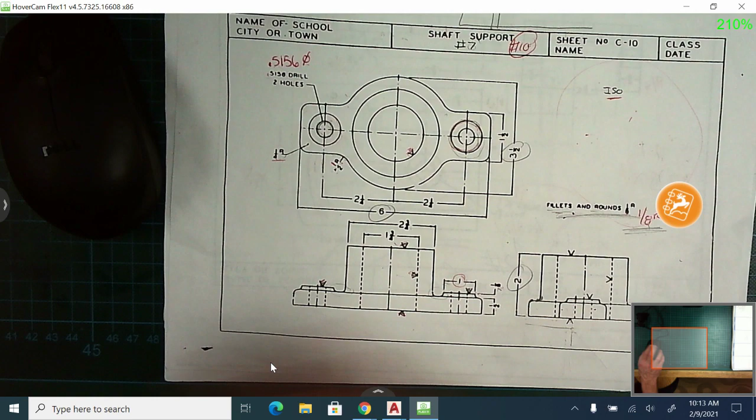In this video, we'll take a look at the shaft support. This is going to be a 3-view drawing: a top, a front, and a right side. We'll also do the isometric here. So find that packet and drawing, and open up CAD borders.

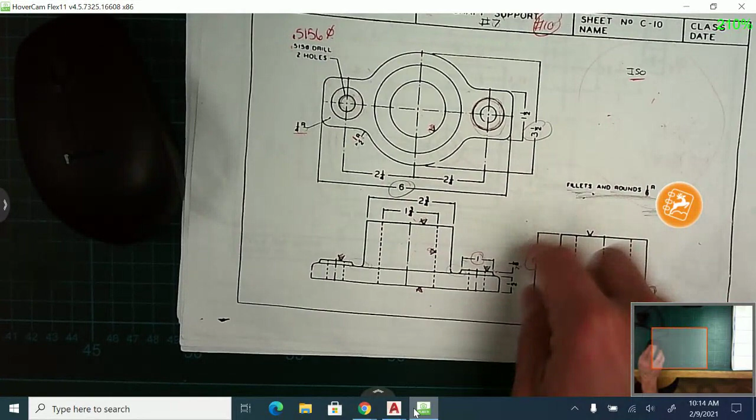Another thing you need to do is determine your overall height, width, and depth. So overall height, how tall the part is, overall width, and then the depth, in this case 3.5. These three numbers I have circled. That's what's going to help you set up the drawing using kind of like an L shape and then offsetting the boxes. Once you get the boxes set up, the three views will fit inside. We're also going to set up a 45-degree miter line to help us project the top to the side and then the side up to the top.

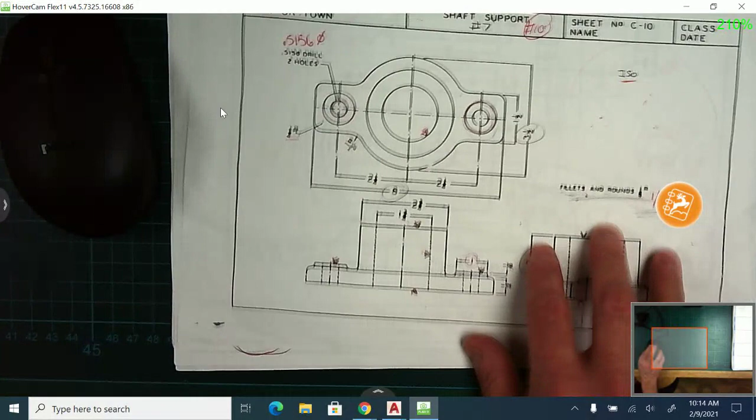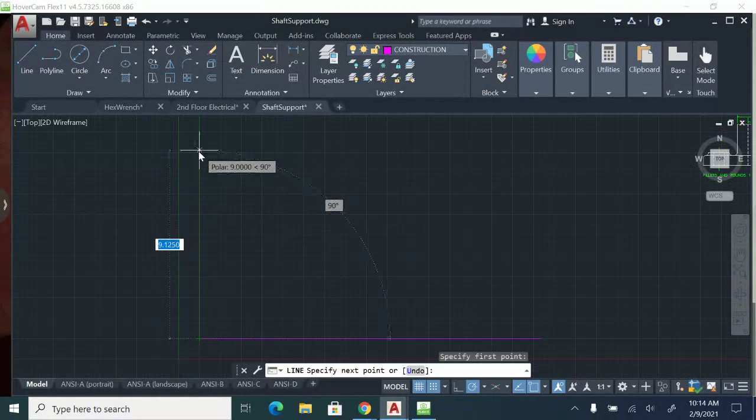So now that I have the height, width, and depth, I'm going to use those as my offsets. First you want to start with the construction line. I like to go about an inch over, inch up roughly from the 0, 0 here. So here I go over, 16 is plenty. You just don't want to make those lines too small, it's better to make them longer. Then here I'm going to go up, 10 is fine. So I kind of have my L shape. That's going to be the lower left-hand corner of this drawing.

And now I'm going to do offset. The height will be 2. Width is 6. I also got to do a 1-inch space in between the views, and then 3.5 for the depth. So for the height, I'm going to do O enter for offset, 2 enter for the height, offset that up. Now I'll do the width, which is 6.

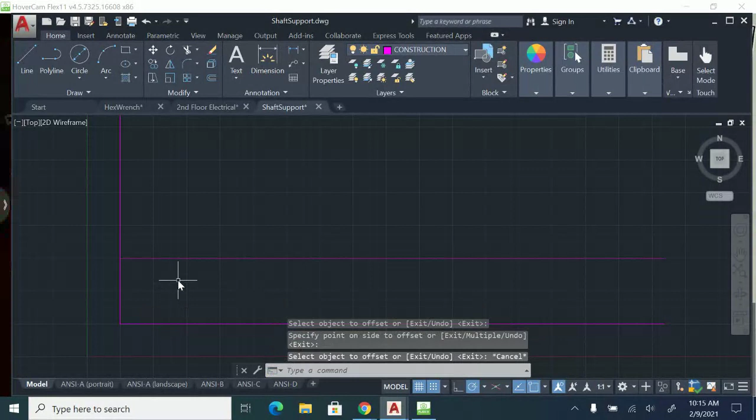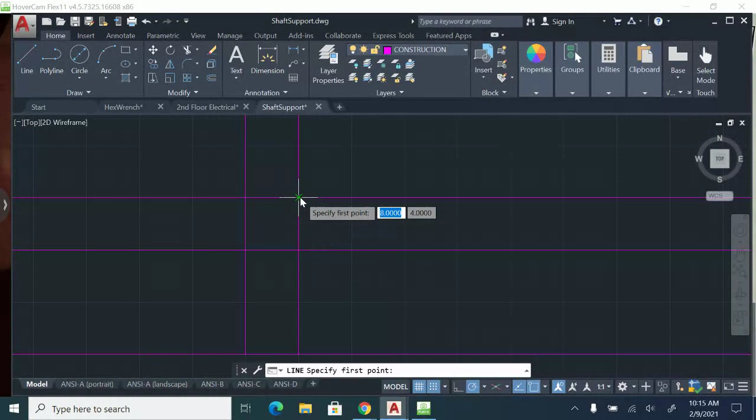Now I need to do my 1-inch space in between the views. So offset 1 inch, this one up, 1 inch over. After you do the 1-inch spacing, you'll notice you'll have a square. The upper right corner of that square is where you want to do the 45-degree miter line to help you project the views. Again, it doesn't really matter how long this one is, just don't make it really short. I'm going to hit tab, 45. We want it to be exactly 45 degrees.

My last offset is going to be my depth, which was 3.5. So offset 3.5.

All right, so now I have my top view, my front view, and my right side view. It's a good habit to just double check the measurements. This should be 6, that should be a 1-inch space, this should be 2, which is good. We want to double check this right side view. So that's 3.5, that looks good. This is 2. So just double check your measurements.

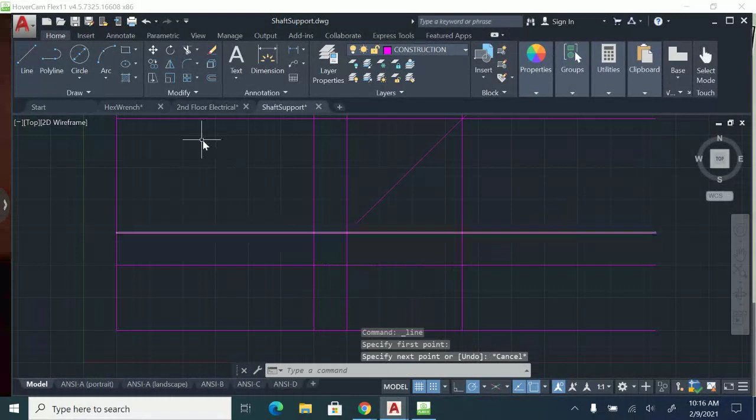Another thing I like to do is hatch the spacing just to help me visualize that that's just a 1-inch space. So you can use your hatch tool by clicking that or H enter, and then I just click in here and down there as well, and then hit enter. So now the 1-inch spacing is hatched in, so I can easily see my 3 views here.

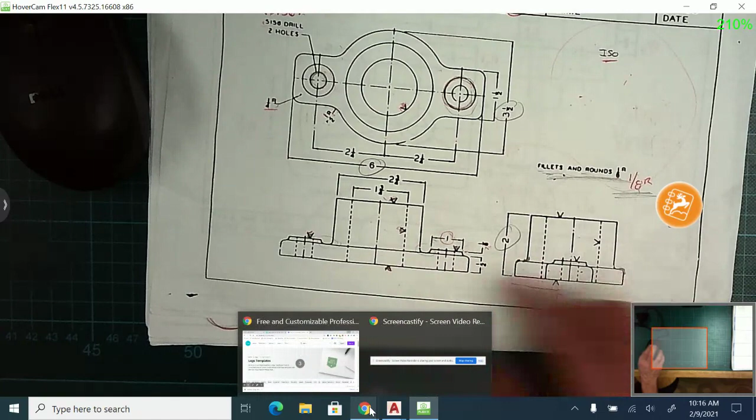And now you just got to start drawing the insides. Again, try to use offset. Like for instance, this base is a 1/2 inch thick. That's the same in the right side view as well. So if I do an offset, I'll set it to 0.5. I'll offset this bottom up a 1/2 inch. So now I have the base not only in the front view, but the right side view.

And if I want really quick, I can switch to visible, use my rectangle tool, and I'll just trace over the base here, hit enter, and then trace over the base there. So that's my 1/2 inch base in the front and side.

Now for the top view, I could kind of do the same thing. I'm going to trace over this whole thing. The reason why is I can easily get to - let's make sure that goes all the way down - I can easily get to the center points, like I can get to the midpoint. I can get to the midpoint here and draw a line down.

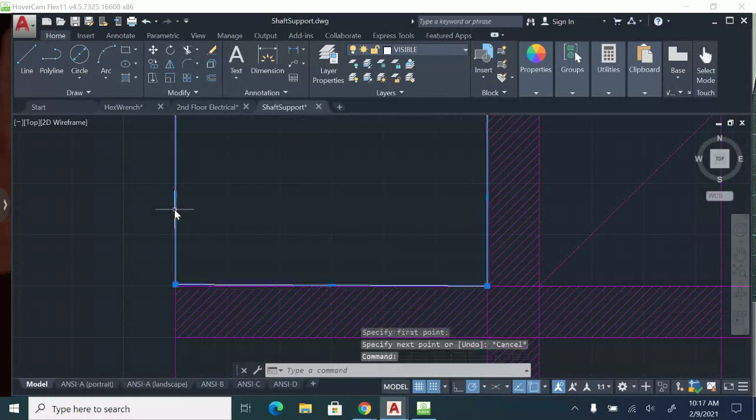Actually, I have to redo this rectangle because I don't think I got it perfect. Rectangle, let's make sure that's from here to there. So make sure you're zooming in, you're getting the right points. And the reason, again, I did that is I can now get midpoint. Midpoint here, go straight down.

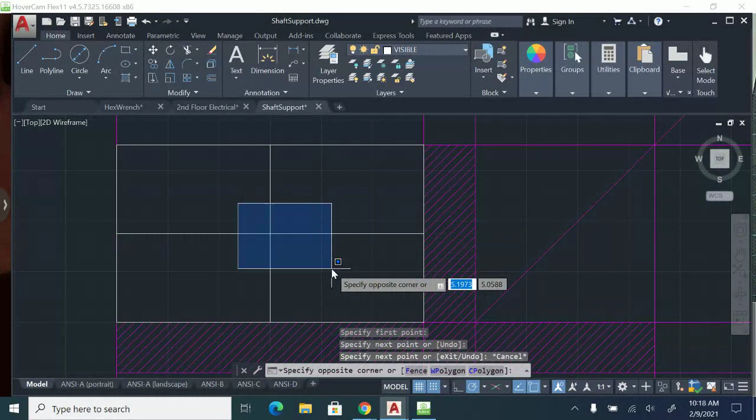And midpoint here, go straight across. So that'll be the center of all those circles. So I have 3 circles, 1, 2, 3.

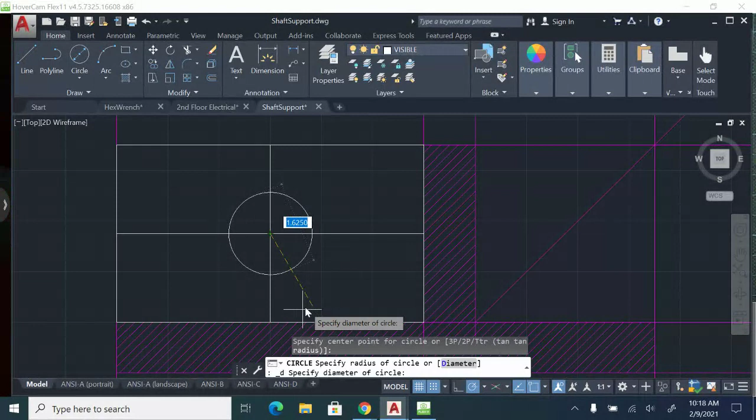The big one is going to be 3.5 diameter. The middle one is 2 3/4 diameter, and the small one is 1.75 diameter. So I go back here, I got to make sure I'm using a diameter circle. Let's do the outside one, which is 3.5. The next one is 2.75. And then the third one is 1.75. So those are my three circles.

The outside one, some of it will be trimmed. The next thing I want to do is get the thickness of this middle part, which is 1.5 inches.

So I already have the middle. I drew that line all the way across. And if it's 1.5 inches total, what I could do is offset that line up and down half of 1.5, which would be 0.75. So I can go up 0.75 and then down 0.75. And that gets me the middle of that top view.

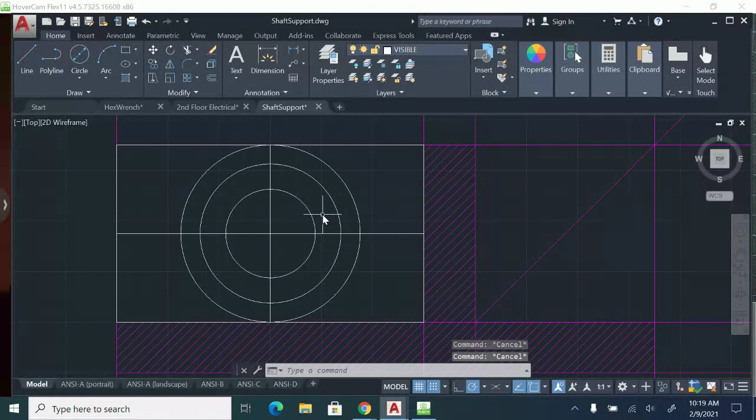So I'm going to do offset 0.75. This line I'm going to go up, click this line, go down. And now for here, I want to trim.

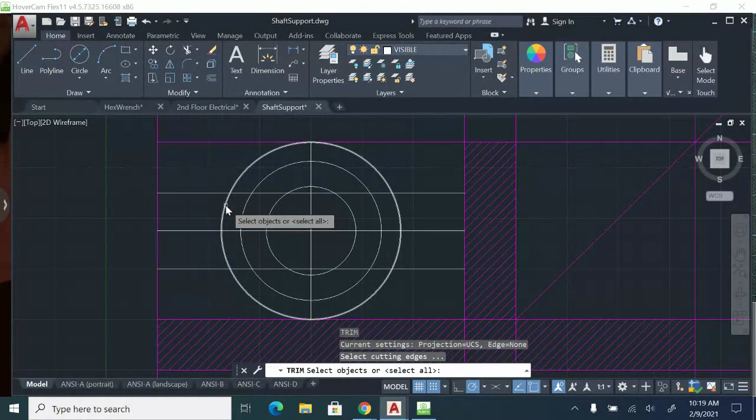So let's do it. Actually, I'm going to delete that rectangle I drew. Now I'm going to do TR enter. I will keep that big circle, hit enter, and I'm going to get rid of these lines on the inside.

Now I'm going to do another trim, TR enter, and I will keep these lines here. 2, 3, 4, hit enter, and I can get rid of the big circle. Now I don't actually need these lines anymore either. Get rid of this, so you can kind of see how it's starting to shape up here.

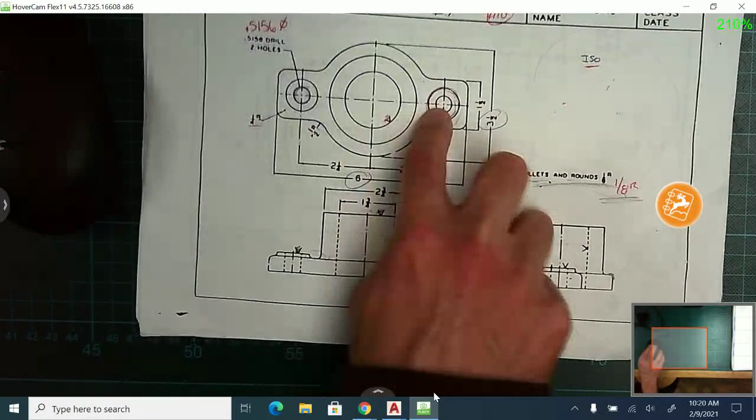And another dimension, I got to get these center points. It's 2.25. From the middle over to this center point is 2.25. So let's do that. So I'm going to go here.

Now for that, I'm just going to draw a line. I'm going to get the midpoint. I'm going to go this way, 2.25. And same thing on the other side. Midpoint here, or center point, and go this way, 2.25.

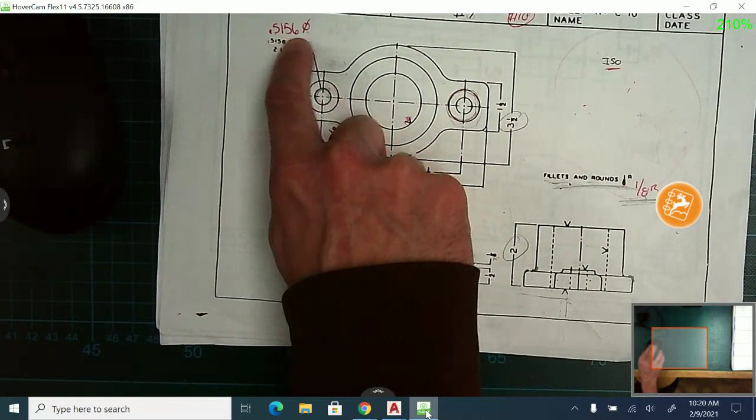Circles, there's two of them. The inside smaller circle is 0.5156 diameter. The larger circle, you find a dimension down here. It's 1 inch, and that's also a diameter. And they're both the same.

There's two of them, so let's do a diameter. Let's do the small one, 0.5156 diameter. And the big one, 1 inch diameter.

Now I could do this too. I could just select both of them. Use my copy tool. Base point would be the center or the end point there, and just move them over to here. So you don't have to redo them.

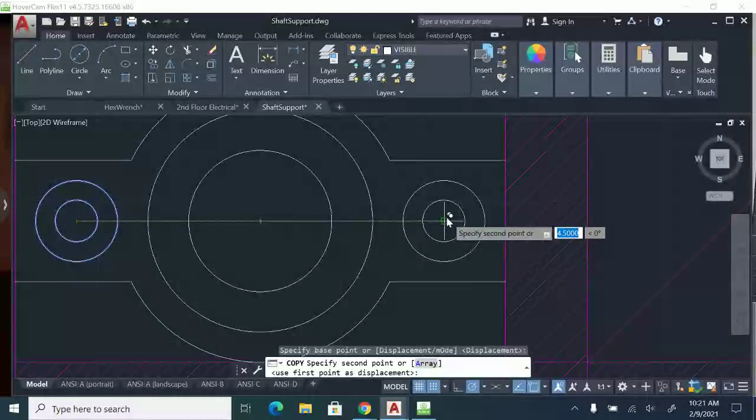I can draw a line now to connect this to here, and to connect this to here. So you're going to delete these lines. You can kind of see where we're at.

The only thing left in this top view is the corners, which you're going to use the fillet tool. 1/4 inch on the 2 outside or the 4 outsides, and the inside corners are 1/2 inch. And you're going to use the fillet tool.

So F enter, R enter, 0.5 is for the insides. Hit enter, it'll remember.

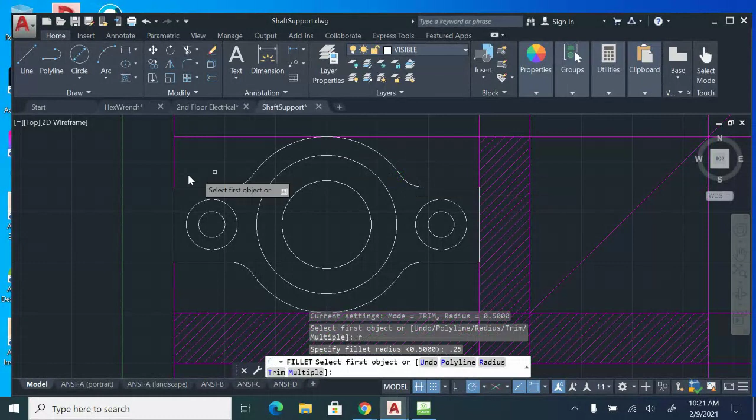And the outsides are 1/4 inch, so I'm going to switch it. So F enter, R enter for radius, and these are 0.25. Okay, hit enter.

There we go. My top view is done, other than center marks and dimensions.

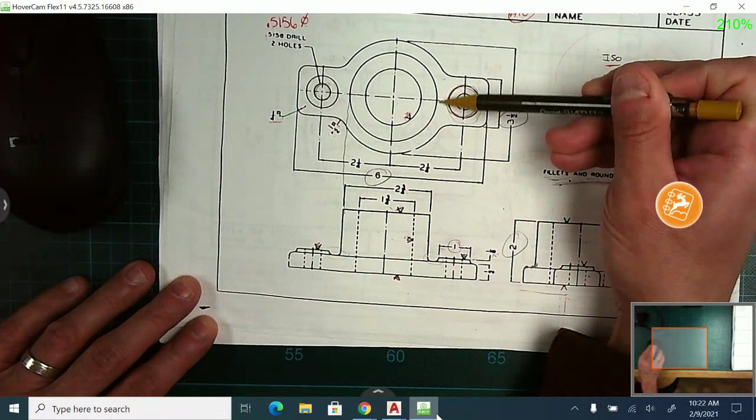Now for this front view, what I could do is just project down. Like I can just grab a line, project down like that. It's going to match up with this. That's going to match up with this. The two hidden lines are the inside circle. Now the two holes here, I can project them down as well.

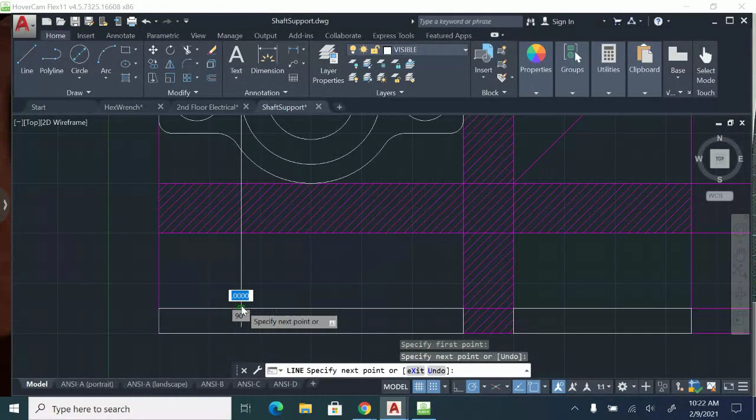I'm going to go back here. We'll start with the visible. Let's do the bigger of the circles, which would be the 2 3/4. It's going to go down to here, perpendicular. And then the right side of it.

Then I got to switch to hidden line for the inside circle. Now that one goes all the way through to the bottom.

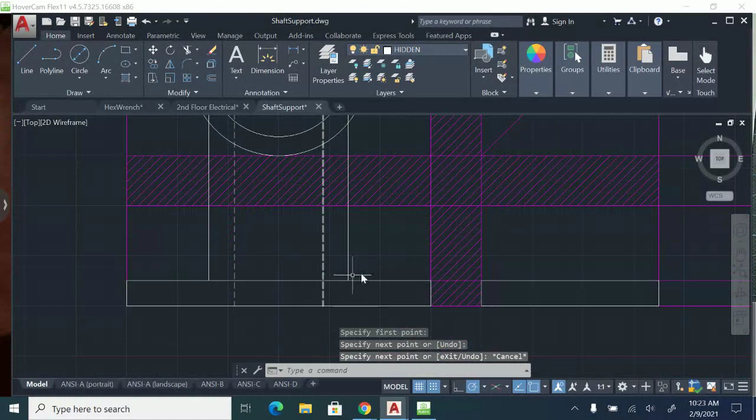And then I can also do this, actually I could leave it on hidden line. I'll do the inside circle here. Now I'll switch it to visible, and I'm going to do the outside circle. Now that one only goes to the top.

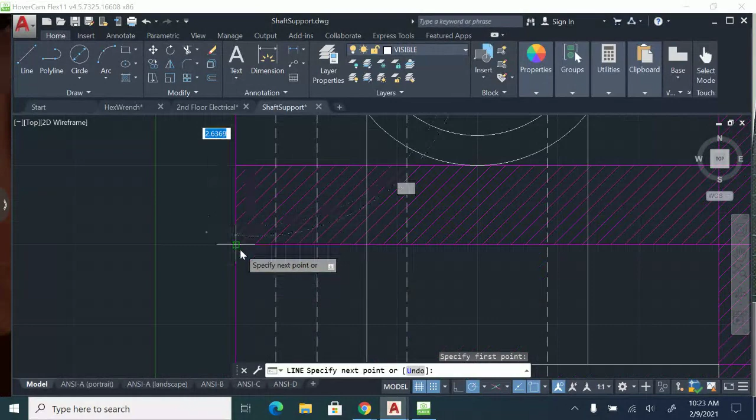And obviously you would do the same thing with these holes and bring them down. Now I can trim a little bit, I don't need all these lines. I'm going to do trim. Let's keep the top of this. Enter. And let's get rid of all these lines to clean it up a little bit. But you see where they just came from.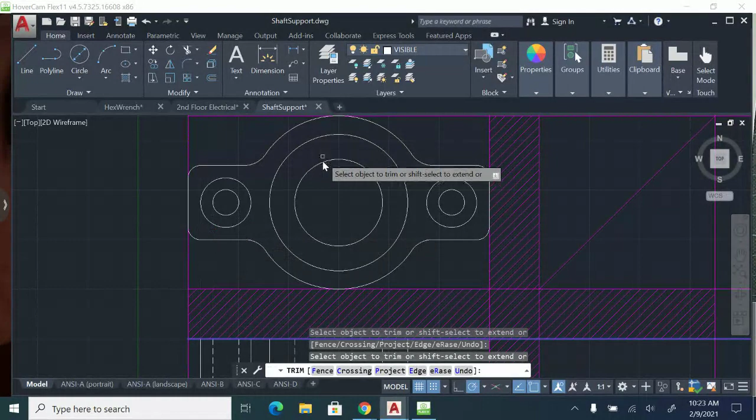All right, and I got to trim even a little bit more now. I need to trim, actually, the thickness too. The 1 inch hole, it goes up a little bit, 1/8 of an inch. So we have that little 1/8 inch measurement here.

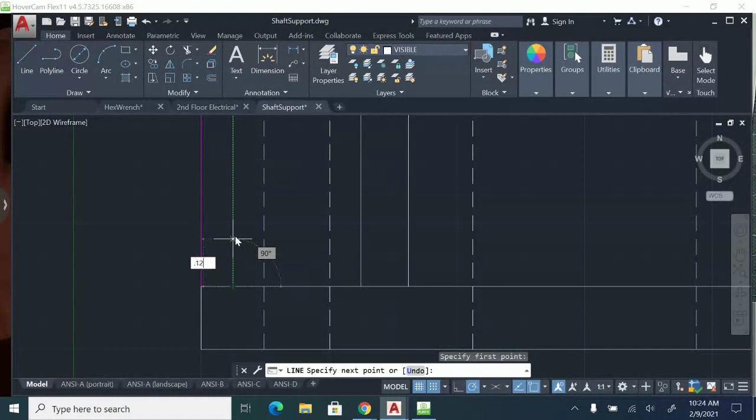Let's do that really quick and offset it. So, or I don't have to offset, I guess I could just do this. I can go in here, grab a line, just go up 0.125, and go over 1 inch and then back down. Now when I trim, I'll keep that 1/8 inch line and get rid of these.

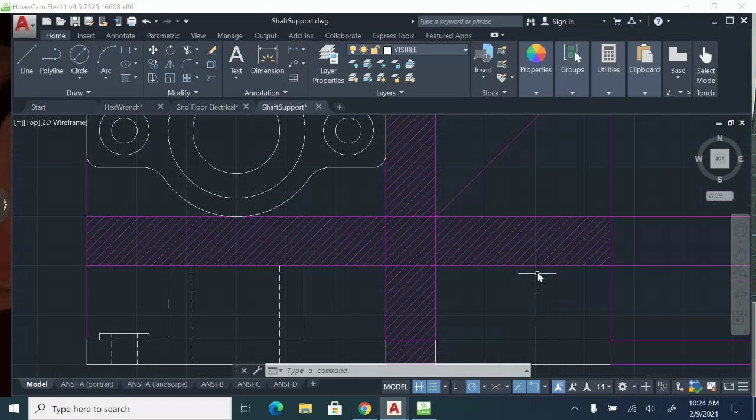And then obviously I would do the same thing on this other side with that one, the right side. A lot of projecting again. I can do...

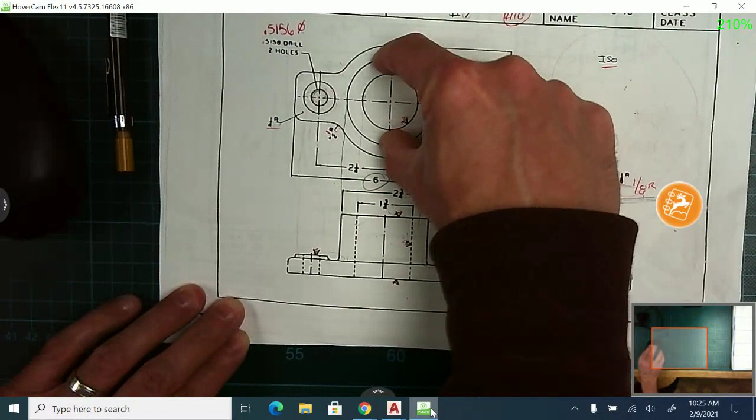Maybe I'll do construction line here to start, since this one I'm going to project over and down. So I need to get this little shape here, that's this part, so I'm going to bring that over and then down. And then same thing, the circles, I got to bring the circles over and down.

So if I go back here, I'm going to use construction line, so maybe I'll start with the circles. We'll do this one here where it hits the 45, the intersection, that's where you want to draw the line down. And the bottom one, again, bring it over where it hits the intersection point, you bring that one down.

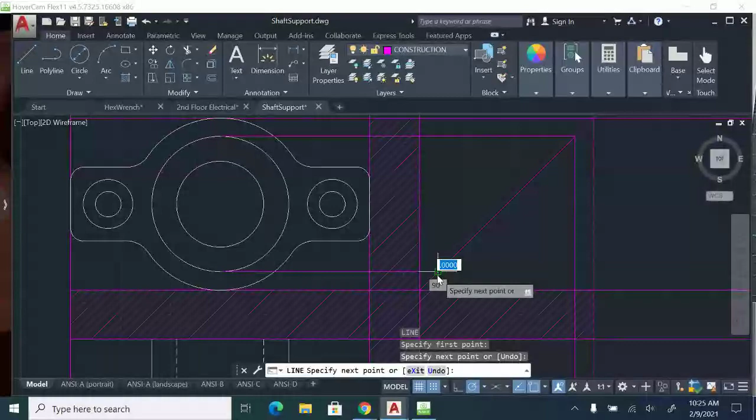So again, you don't have to do any measuring. This is, again, it's called orthographic projection, kind of does the work for you. Grab another line, we're going to do the inside circle, which eventually we'll put that on a hidden line layer. That one goes all the way down to the bottom. And the inside circle here to where it hits the intersection point of the 45 and bring that one down.

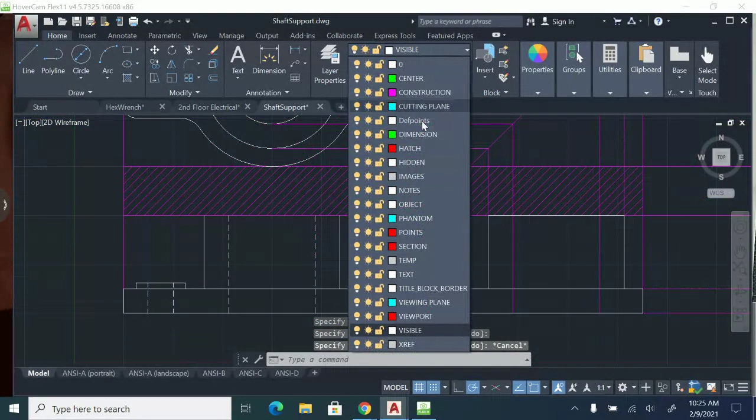So if I want now, I could do this. I can switch to visible layer, grab a line. I can go draw up, over, and down. And then the inside one is hidden, so I click hidden line, and I just draw a hidden line from here. I go down, and then here I go down.

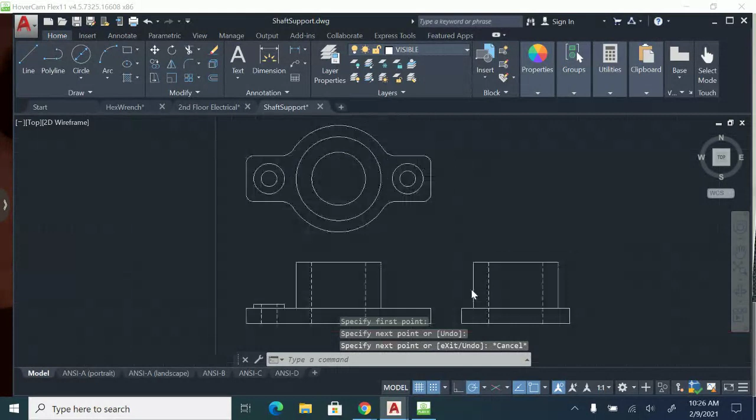And if you want really quick to kind of see where you're at with this, turn off the construction lines every once in a while. See here, it looks like I have to go back to visible, I got to connect the top of this. So you can kind of see where we're at here. So the only thing really left is this inside part, which is this part of it.

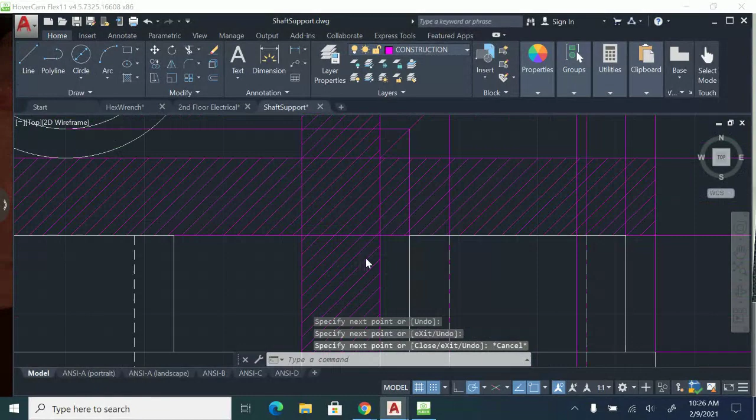Let's turn our construction lines back on. All right, so I'm going to go construction line, grab a line. I'm going to go from this point where it hits here and then go down. And then same thing for the bottom point here, bring that over and then down.

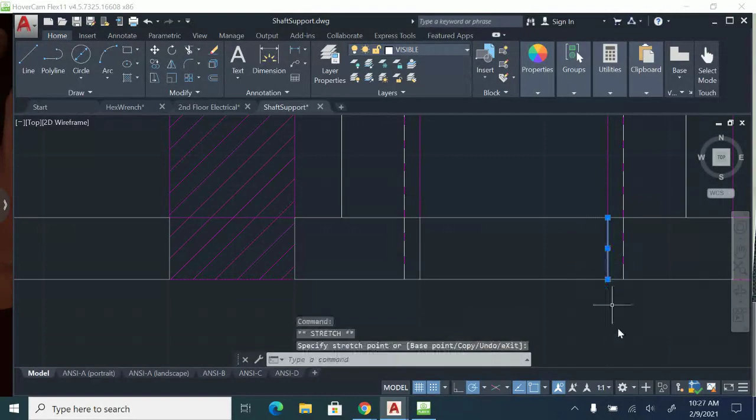And then I can switch to visible, and I'm going to draw this up, line up, and this line up. So those lines that I just drew are right here on the packet. This line right here I just got, and this line I got.

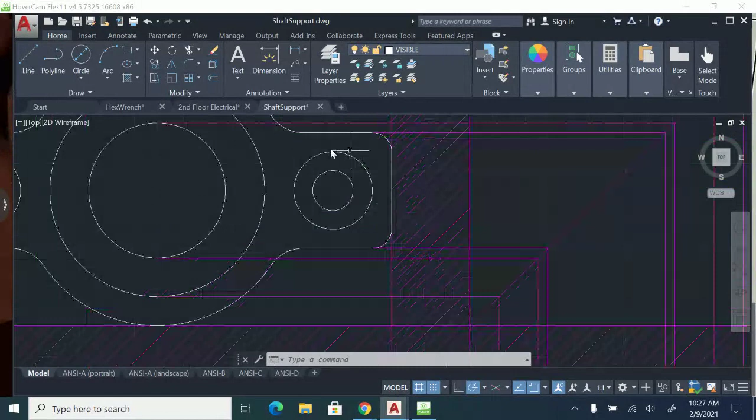Now I got to get the hidden lines and the 1 inch part up top too. So the two hidden lines, a couple different ways you could do it. You could project it down. Like I could project this over and down, project this over and down, project the two hidden lines over and down.

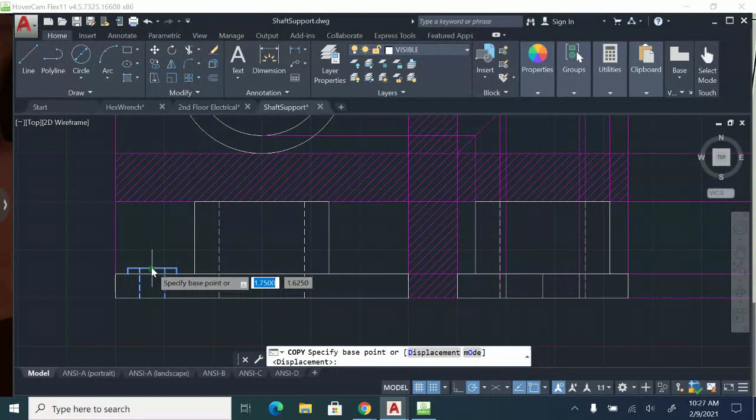Or if I find the midpoint here, so I know that's the middle, I could just take this that I've already done, copy it from the middle, or I guess I got to go right here, and I could just copy it over to right there. And then I'm going to delete this little line since I don't need it anymore. I'm going to turn off my construction lines again and see what I got here.

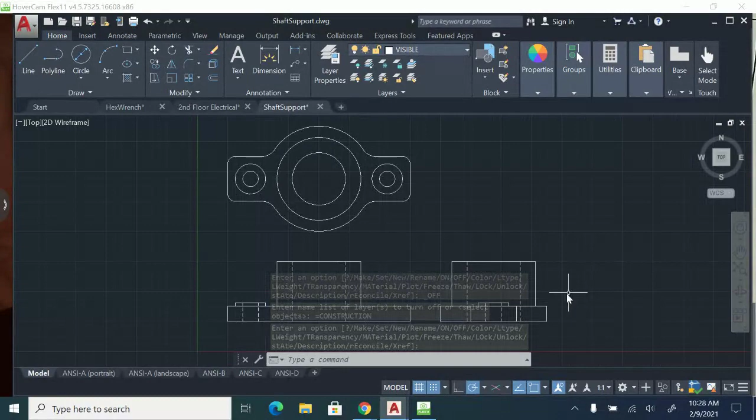So it's looking pretty good. The only thing left is this. I have fillets and rounds, 1/8 inch radius, so that's all these little curves and corners. Like I have an 1/8 inch fillet here, an 1/8 inch round here. So all these little curves are 1/8 of an inch, and you use the fillet tool to do that.

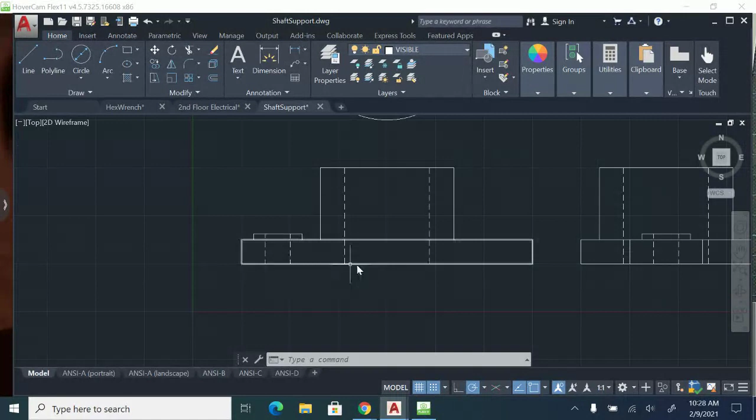If I go back here, so there's a lot of them I got to do. So I'm going to do an F enter, R enter, set it to 1/8 of an inch. I'm going to zoom in here, we'll start with this view. I'm going to do the round, hit enter, and the fillet there. And actually, because I used the rectangle tool, did you see what happened there? It kind of deleted everything. Let's do that one more time.

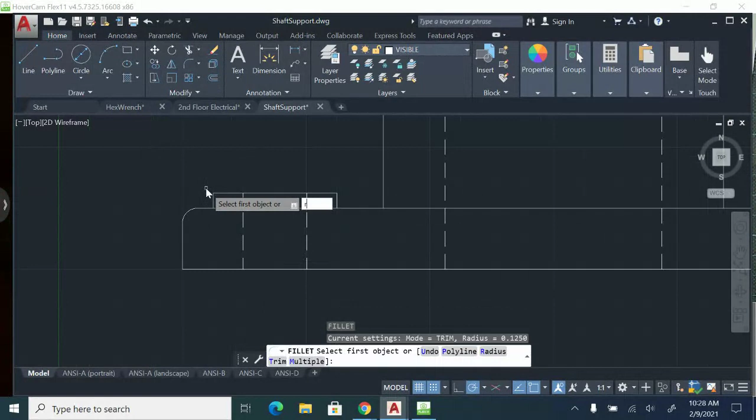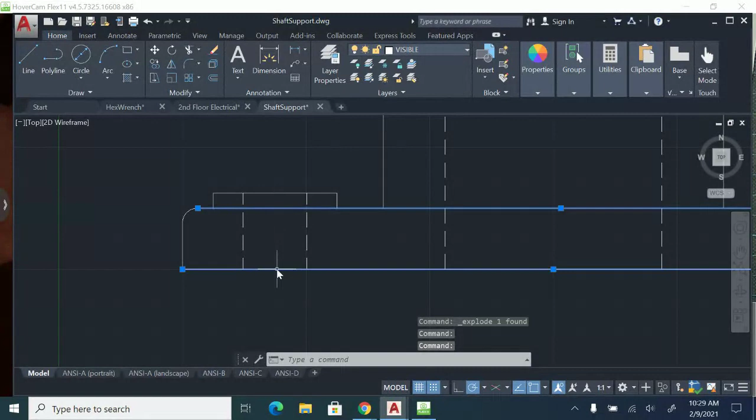See how it's deleting most of it? Since I used the rectangle tool, I'm going to click explode to break it up so it's no longer a rectangle. Hopefully now it's all individual pieces. So if you use the rectangle tool, you may need to explode it first.

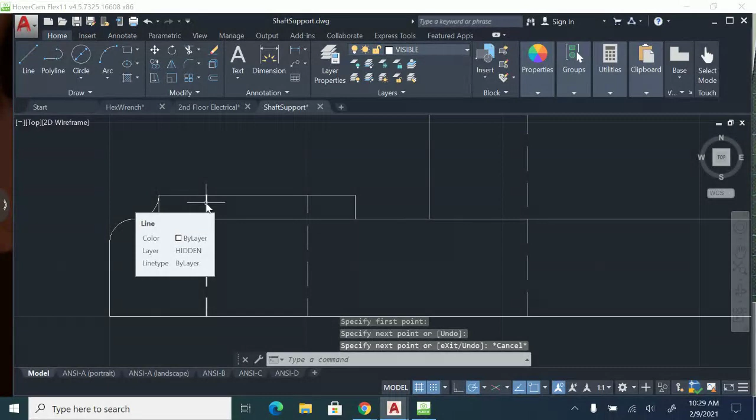Let's try that again. F enter, R enter, 1/8 of an inch. So it did delete that line again, but it didn't delete everything. If that happens, you're just going to have to redraw this line in. And then I can also get rid of this line, I don't need it.

F enter, R enter, make sure it's set to 1/8 of an inch. I got to do here, I got to do right here. Again it deleted the line. Sometimes it does that for some random reason. I'm going to go just draw it in again.

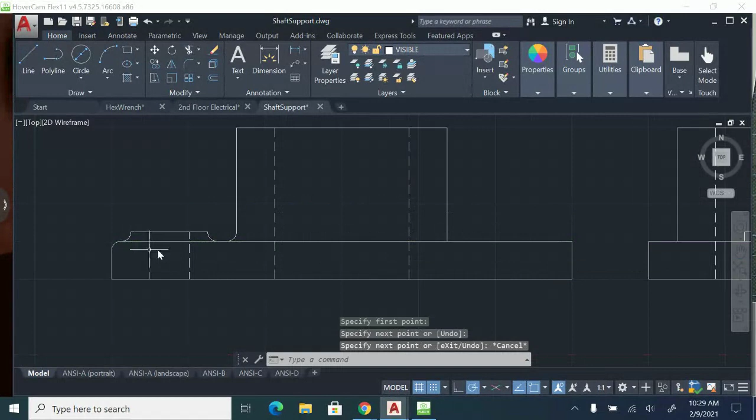So this left side looks pretty good. That's what it should look like. You would do the same thing on the right side. If it deletes the line, you're going to have to redraw it in.

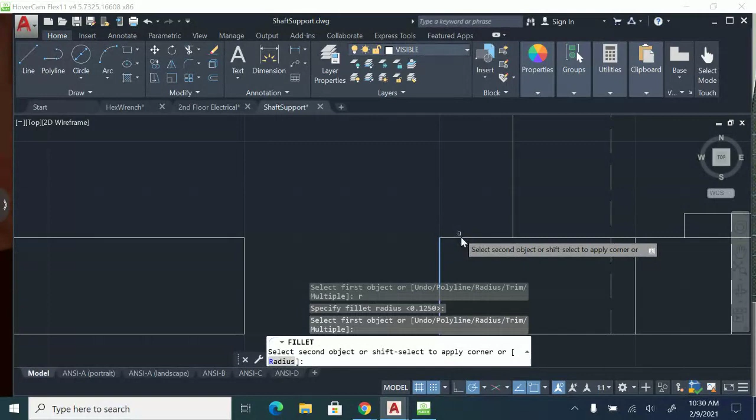Now I'm assuming the same thing's going to happen here because I used the rectangle tool, so I'm going to explode that. And let's do our fillet, 1/8 of an inch. We need to do the outside corners, the inside corner here. And if it deletes your line after you do the fillet, redraw this in. Let's do another fillet here.

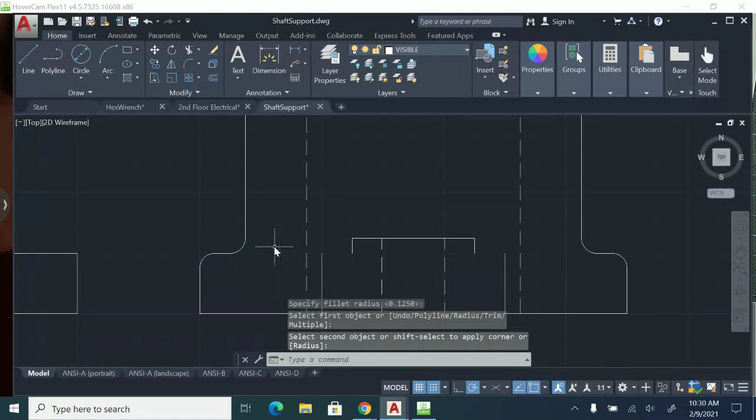And we'll bring this across. Sometimes the fillet deletes too much. Let's go across, this should hopefully be the last one. You could even, since we already did it once, just do the same thing.

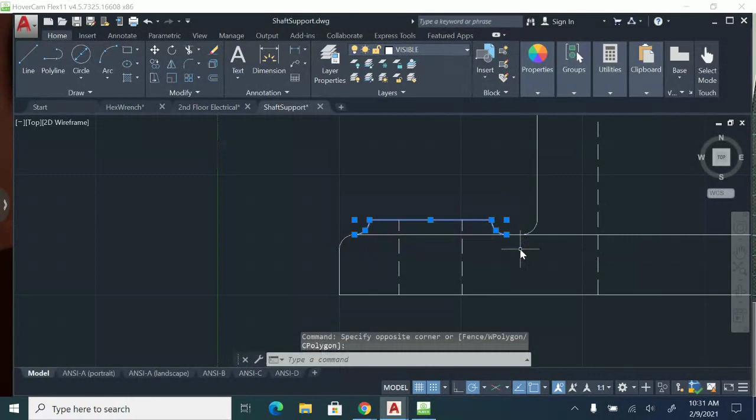I could click this, copy it from the base point or the midpoint and copy it over, which would save me a little bit of time too. So I copy, let's see, I'll go from this midpoint to right there. That's another option too, so you don't have to keep redrawing the line.

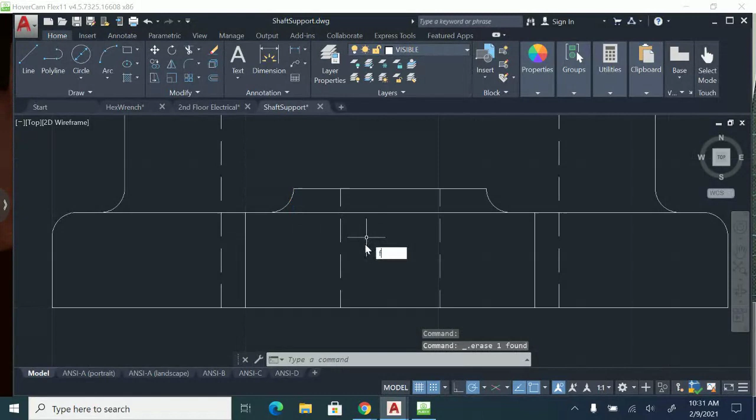And then the last one, F enter, R enter, you're going to have a fillet here and here. Final time, let's draw this line in. So that's what your right side view will look like.

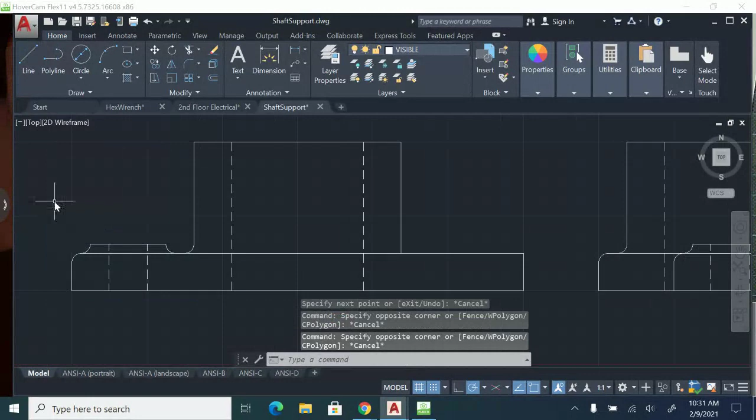Front view, obviously I got to redo this side, but it's the same as that. You could even mirror. I could select this, do a mirror, select my midpoint, mirror that to the other side. Erase source object, no. And then I just have to trim this corner here.

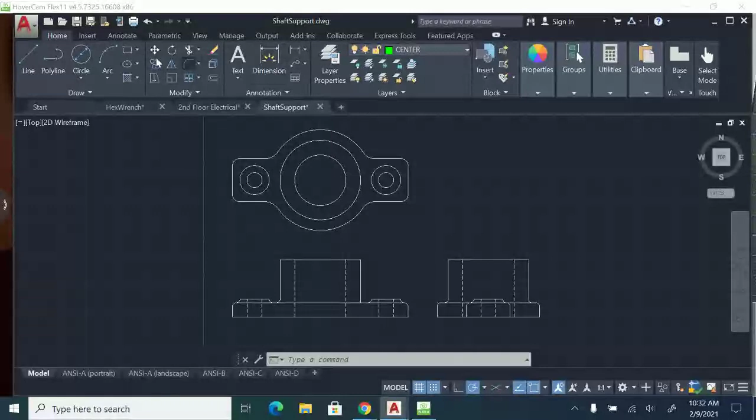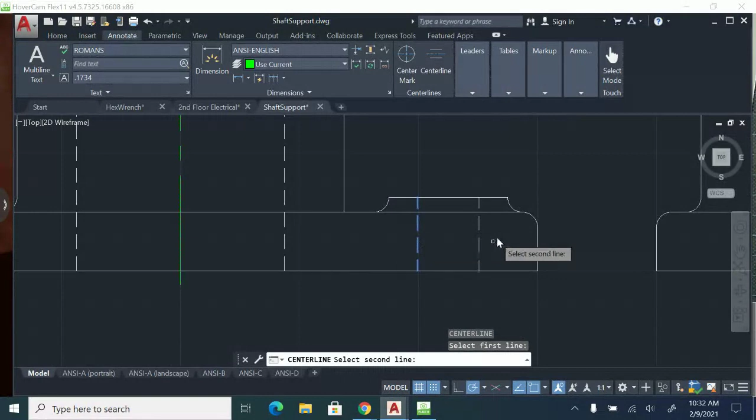After the part is done, you're going to want to switch to your center layer. Let's do some center marks. I got a big center mark there, the holes here. Down here you're going to use center line. You can click the hidden lines, and over here you want to click the hidden lines as well. So we're using a mix of center mark and center line to get all the center lines on there.

Then I would just go in and do all my dimensions. So it looks kind of like this. Don't forget to do fillets and rounds, 1/8 inch radius. That's just a text box. I click text. Make sure you're on the dimension layer when you dimension.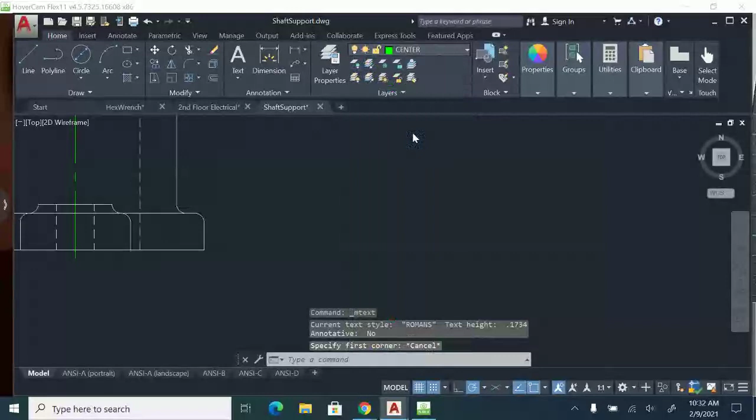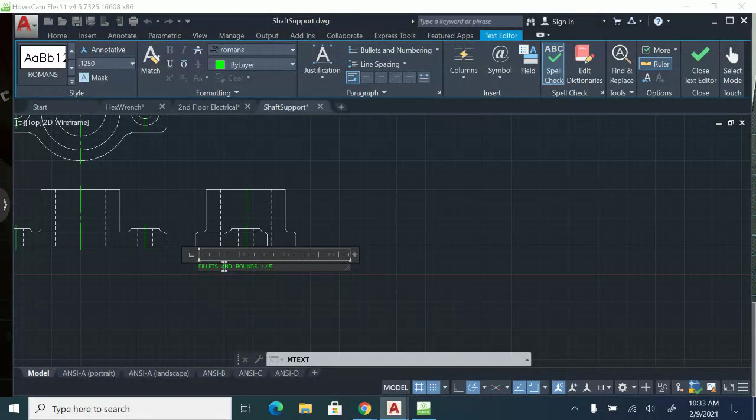I'm going to do a text box, put that down here, and I want to set the size to be 0.125. Hit enter, and then I can type in what I want. And then close the text editor. So make sure you add that on.

Double check your work, make sure you have all the other dimensions on there. We can do a Q leader as well. Q leader, first point will be here is fine. I'm going to drag this out, click, go over this way, click, same thing, 0.125 for the size, and then I type in what I want it to say.

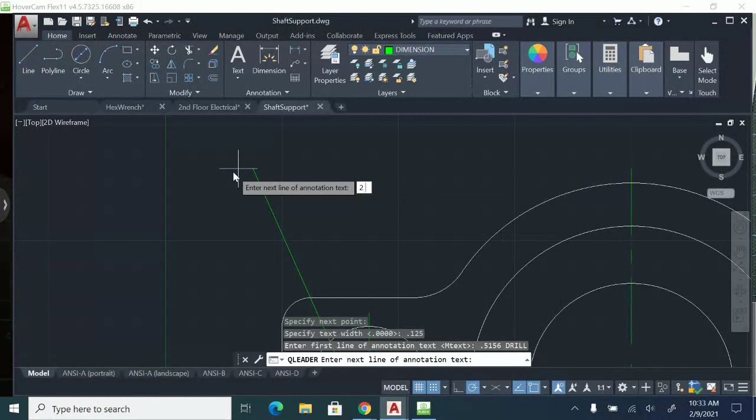Drill is the same thing as diameter, or you could use the diameter symbol if you want. Hit enter, then type in 2 holes, and then enter, enter, close it off. I'm going to double click, so this is on 2 lines. Close it again.

And when you're finished, it'll look something like this. And in the next video, I'll go over how to set up and start the isometric.